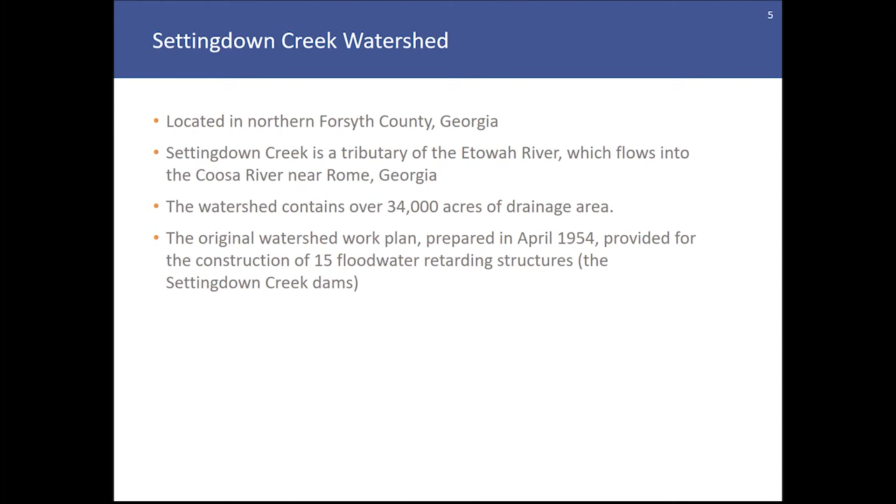The Settingdown Creek watershed is located in northern Forsyth County, Georgia. The creek is a tributary of the Etowah River, which flows into the Coosa River near Rome, Georgia. The watershed contains over 34,000 acres of drainage area, and the original watershed work plan, prepared in the early 1950s, provided for the construction of 15 floodwater retarding structures known as the Settingdown Creek dams.

This slide presents a delineation of the watershed overlain on aerial photography taken from the early 1960s, shortly after the Settingdown Creek dams were constructed. The watershed has changed some over the past 60 years with residential and commercial development entering this region.

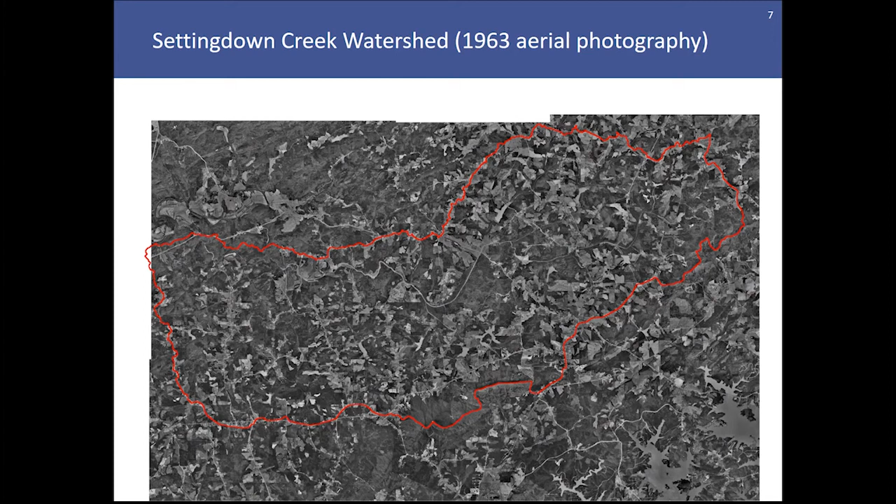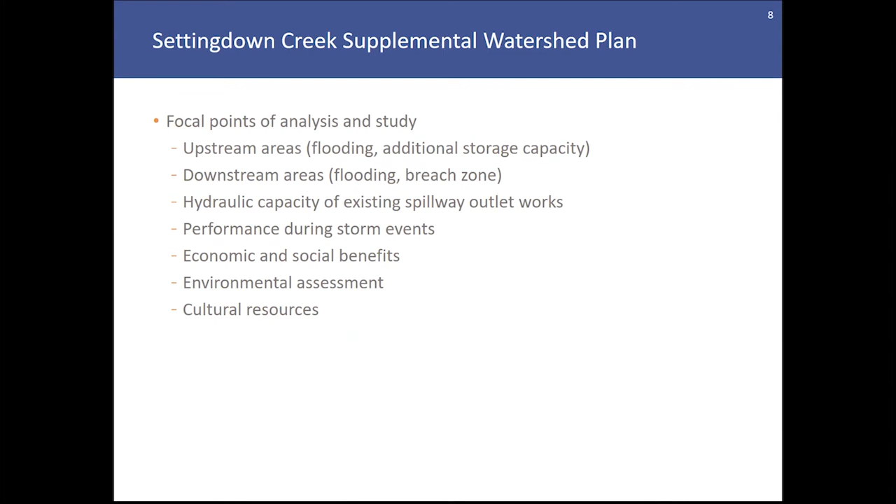Focal points of analysis and study associated with the plan include upstream areas subject to flooding, as well as an analysis of the need for additional storage capacity. Downstream areas are considered with regard to flooding associated with the 2 through 500-year storm events, as well as hypothetical breaches of the dam. An evaluation of the hydraulic capacity of the existing spillway outlet works was performed for various storm events. An analysis of the economic and social benefits provided by the dam was performed, as well as an assessment of environmental and cultural resources in the vicinity of the dam.

Settingdown Creek Dam number 56, which is the subject of this presentation, meets Georgia Safe Dams Program criteria to be considered a Category 1 high hazard potential dam. This means that failure or improper operation of the dam would likely result in the loss of human life.

The dam requires an operating permit from the Safe Dams Program. Previous dam assessments indicated that the dam does not comply with current SDP rules and requirements, which necessitated this planning study to further investigate its performance. The dam is not exempt from SDP rules and requirements.

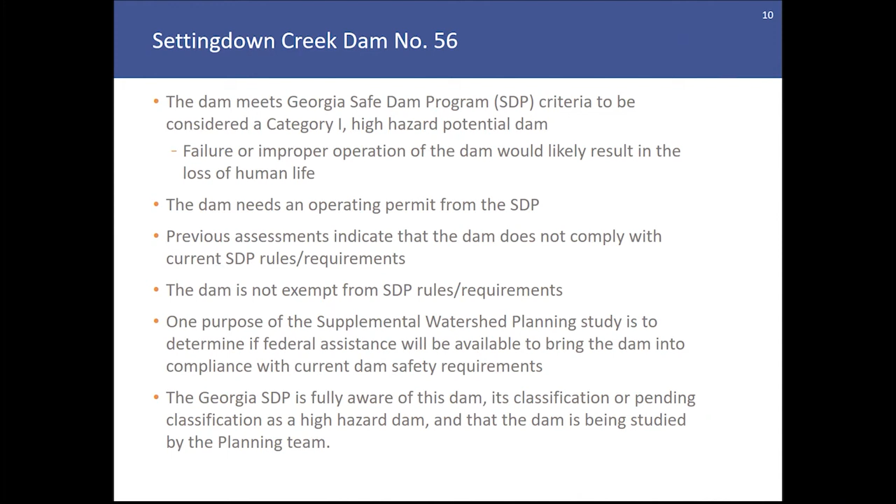One purpose of the planning study is to determine if federal assistance will be available to bring the dam into compliance with current dam safety regulations. The Georgia Safe Dams Program is fully aware of this dam, its classification as a high hazard dam, and that the dam is being studied by the planning team.

Some original design features of the dam include that the dam was not originally designed as a high hazard dam. The purpose of the dam is flood mitigation, and a secondary purpose is sediment accumulation and storage.

The principal spillway for the dam is composed of a reinforced concrete riser structure and a nearly horizontal pipe or conduit that connects the riser structure to the downstream end of the dam, where flows through the pipe discharge into an outlet channel beyond the downstream slope.

A vegetated earthen auxiliary or emergency spillway is also included with this dam, which is meant to convey flows associated with low frequency, high intensity storm events.

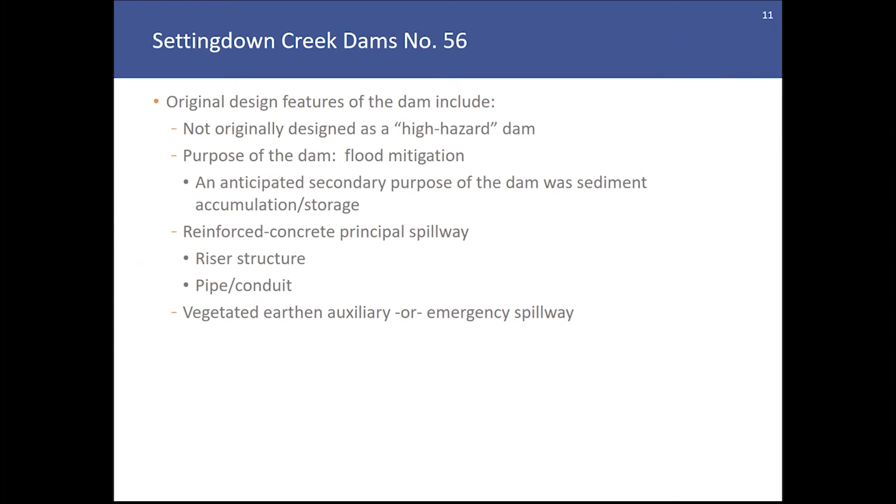Settingdown 56 is located west of Georgia 400, north of Hubbard Town Road, and south of Plainsman Circle. Construction of the dam was completed in 1954.

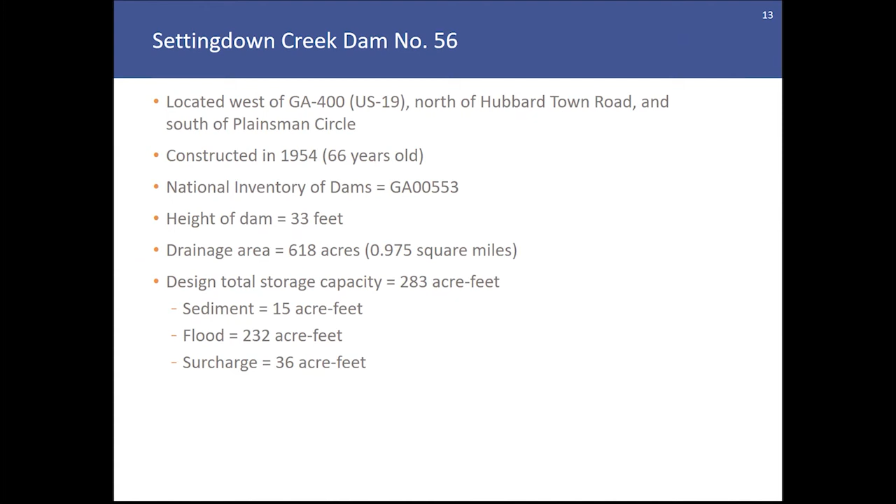The dam appears on the National Inventory of Dams and has a surveyed height of 33 feet. The drainage area is almost 1 square mile, and the design storage capacity of the dam is 283 acre feet, which includes consideration for sediment storage, flood storage, and surcharge storage.

We'll fast forward to a more current aerial photo and notice that the area immediately upstream of the lake has been developed with a residential subdivision, and some development has occurred immediately downstream of the dam on either side of the creek that discharges from the principal spillway system.

Note that Georgia 400 is located immediately to the east, or to the right of the dam and lake, in this view.

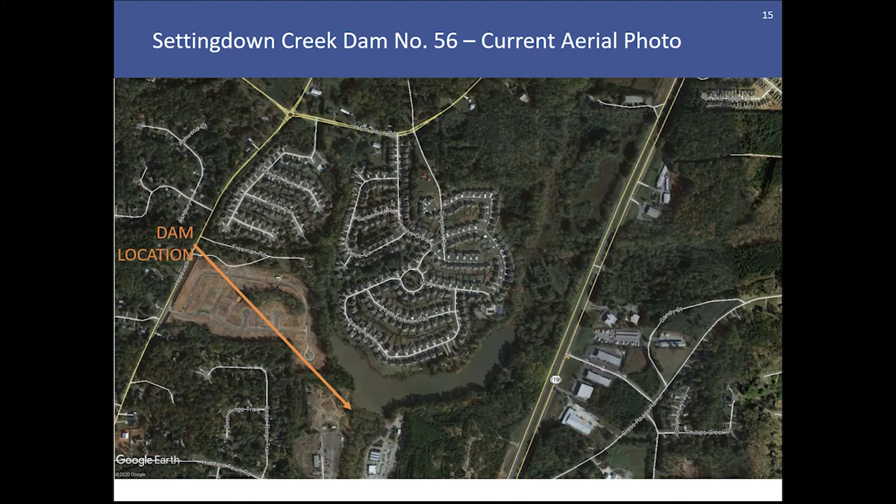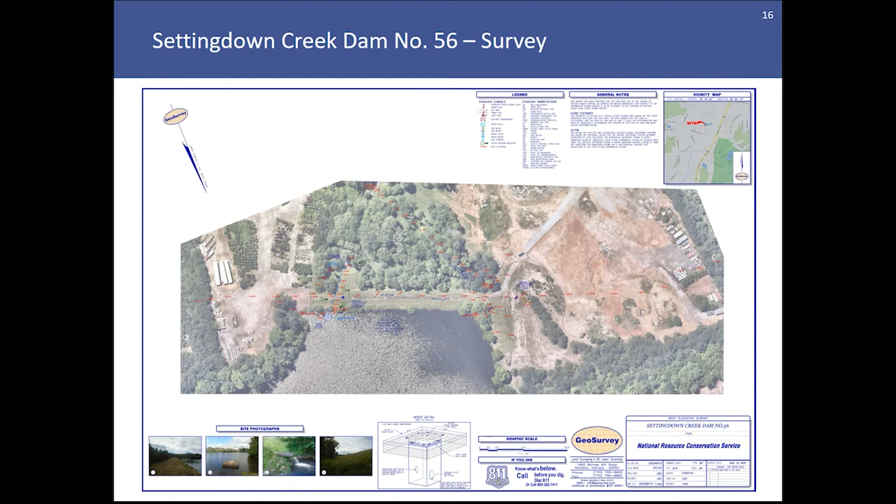This is a topographic site plan of the dam. The principal spillway is indicated near the left side at station 300 of the dam center line, and the auxiliary spillway is located at approximately station 700 in this view.

You can see that wetland areas delineated as part of the environmental survey have been identified backing up to the downstream toe of the dam. As we view this, keep in mind that downstream is up on the page and the lake is down on this particular view. Also of note is the presence of a sanitary sewer line near the right end of the dam.

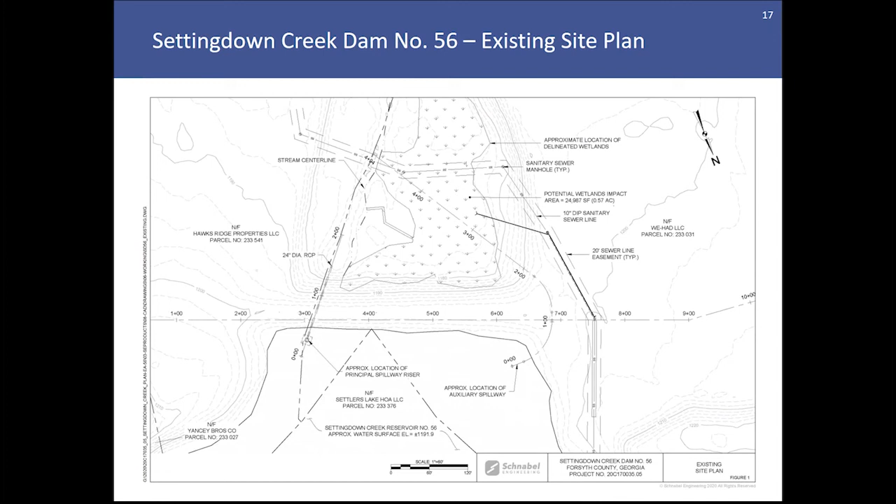The sanitary sewer runs through a portion of the auxiliary spillway channel and then turns, crosses the creek, and runs downstream, generally parallel to the creek that is downstream of the dam.

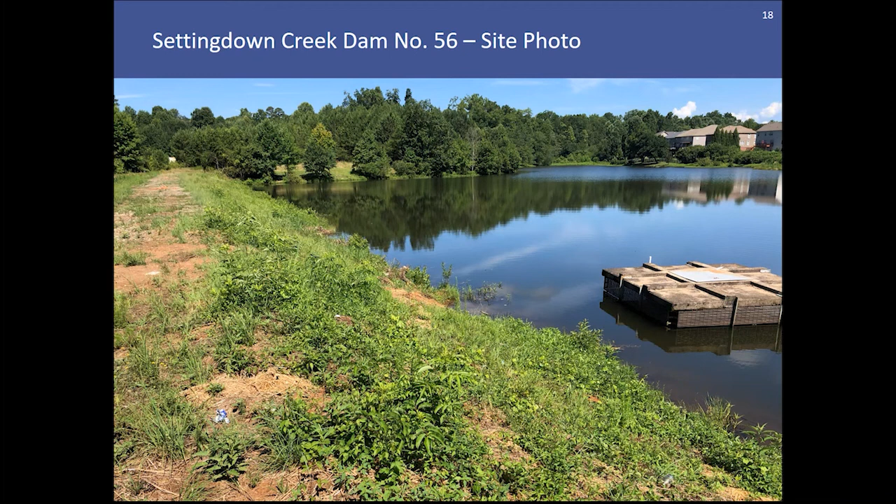This photograph is taken from the crest of the dam, looking slightly in the upstream direction toward the inlet channel of the auxiliary spillway. Indicated on this photo are the concrete riser structure, the upstream slope of the dam, and the crest of the dam.

At the top right-hand side of the photograph, you can see some of the houses that are part of the residential development just upstream of the lake.

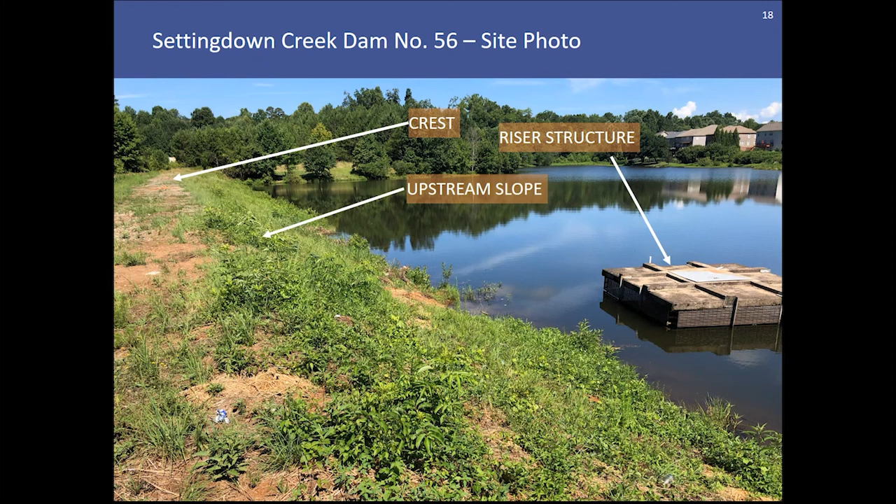This photograph is taken from the left side of the plunge pool downstream of the principal spillway outlet. We're looking in an upstream direction. The downstream slope of the dam is indicated in this view, along with the concrete principal spillway conduit and the riprap lined plunge pool for the dam.

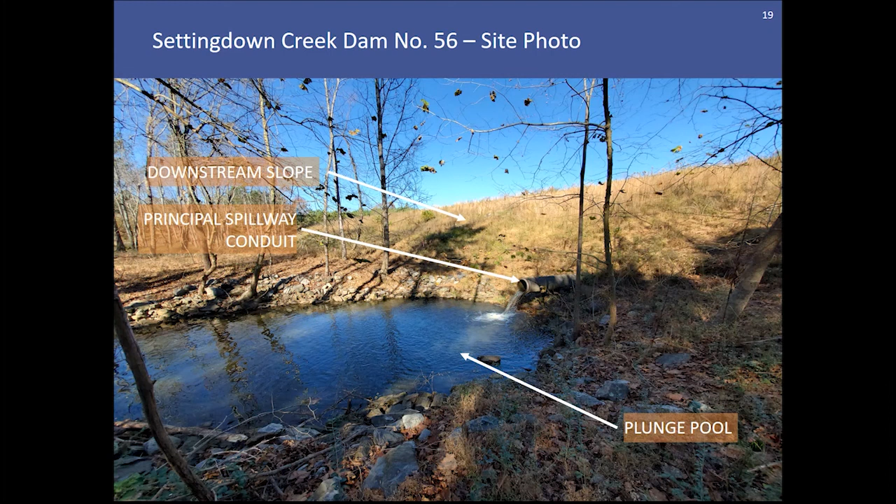An environmental survey was performed as part of the planning effort. The aquatic resource survey exhibit on the left-hand side of this slide shows the limits of survey performed for dam number 56, along with the locations of streams, wetlands, and open water that were identified.

Also shown are locations where invasive species in the form of Chinese privet, a vegetative invasive species, are located. As a result of the environmental survey, no protected species were identified or found during this work.

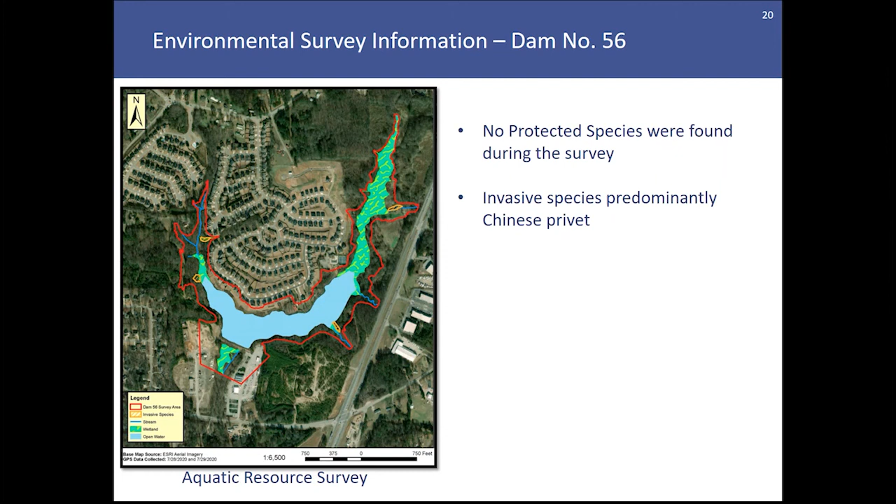A phase 1 cultural resources survey of the dam and its vicinity was also conducted. The cultural resource survey map on the left side of the slide shows the location of survey transects and shovel tests that were performed. A literature review was also performed to identify potential historic items of concern within the vicinity of the dam.

The study concluded with no archaeological resources recorded. The dam, being older than 50 years, is technically eligible for the National Register of Historic Places, but its listing is not recommended. Although the dam is old, there are no unique features or characteristics of the dam or its design that merit its inclusion on the National Register, in the opinion of the Cultural Resources team. No additional cultural resources work is recommended for this dam.

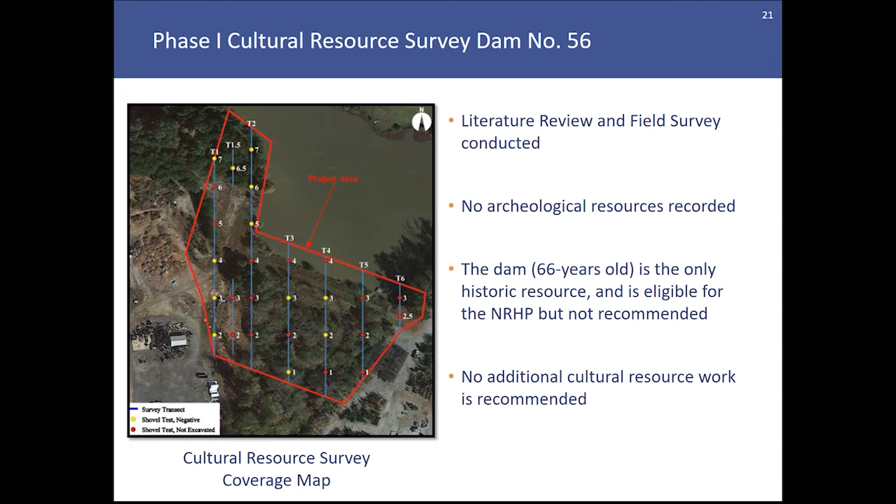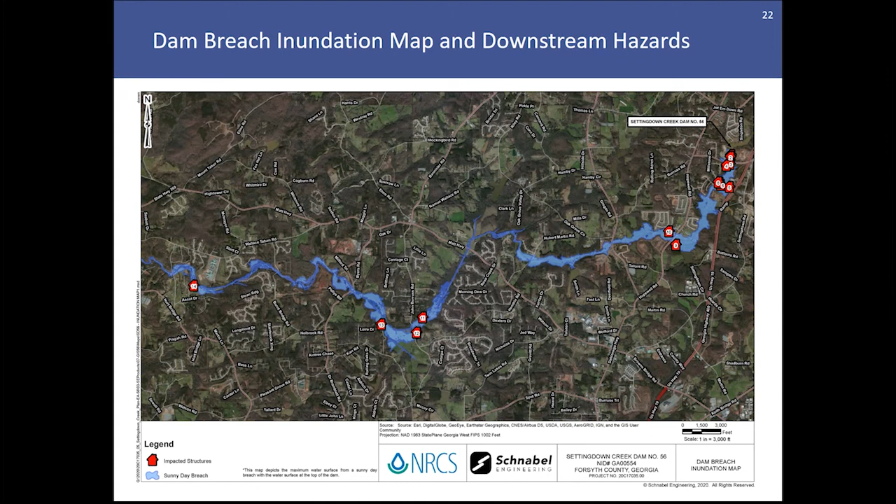In addition to the breach analysis, downstream flooding analysis associated with the 2-year through 500-year 24-hour storm events was considered. This map shows the extents of flooding associated with the 100-year and 500-year storm events in yellow and purple, respectively.

Additionally, some structures would be subject to flooding during these events, and those structures are indicated with the red numbered houses.

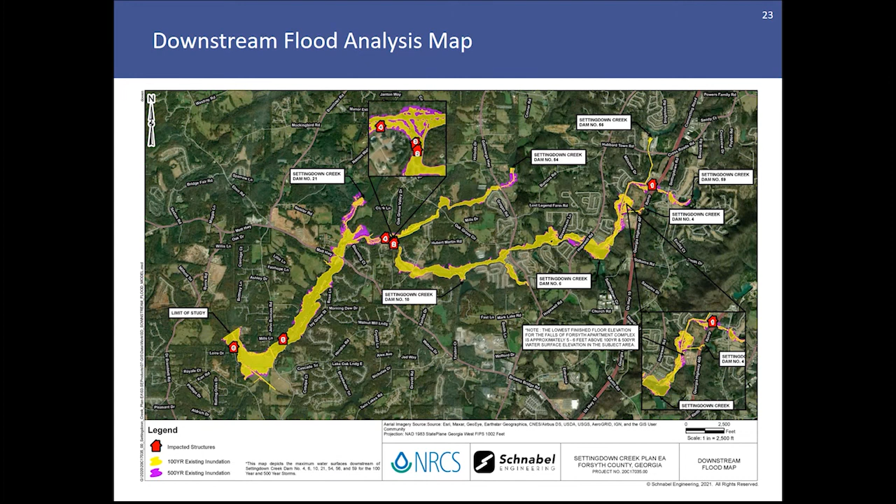Also, as part of the analysis, storms were routed through the dam and spillway outlet works to determine flood levels upstream of the dam.

The normal pool and elevations associated with the auxiliary spillway control section and dam crest are indicated on this view, as well as water surface elevations associated with the 100-year and 500-year storm event.

Additionally, storms greater than the 100-year and 500-year storm event are shown. The Georgia Safe Dams Program storm event is indicated in yellow, and the NRCS design storm event elevation is indicated in green. Note that there are 2 residential structures around the upstream edge of the lake that would be subject to flooding during the Safe Dams Program storm event and or the freeboard hydrograph storm event, which is the NRCS storm.

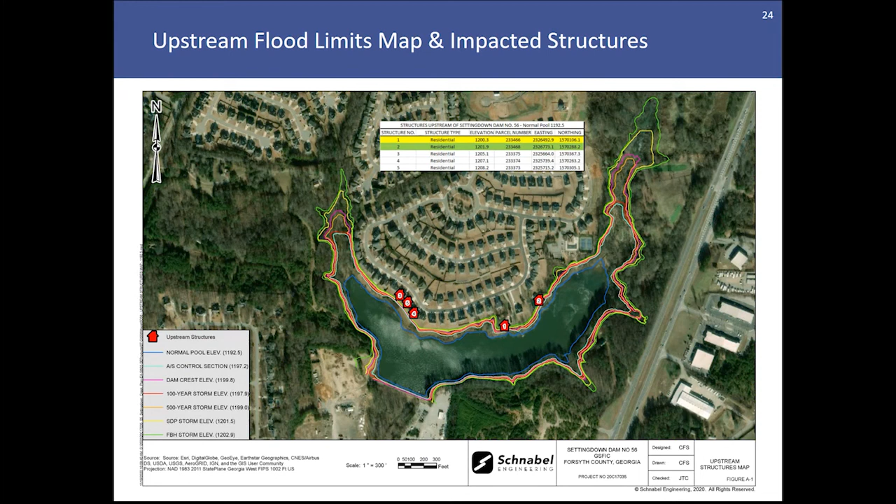This is a review of the existing deficiencies identified with the dam. Based on a review of records, the normal pool elevation of the lake was raised by 11 feet sometime during the 1970s without authorization.

This blocking of the principal spillway riser structure creates an issue with the level of downstream flood protection that the dam was originally designed to be able to provide. As noted previously, the dam was cleared of trees and inappropriate vegetation during the summer of 2020.

An underwater inspection of the riser structure concluded that portions of the slide gate assembly are worn and or corroded. It's unclear whether or not the gate system is operable at this time.

Portions of the riser concrete are cracked and or spalled, and a closed circuit television inspection, or CCTV inspection, of the interior of the principal spillway conduit was performed, and the condition of the pipe was determined to be acceptable for continued use.

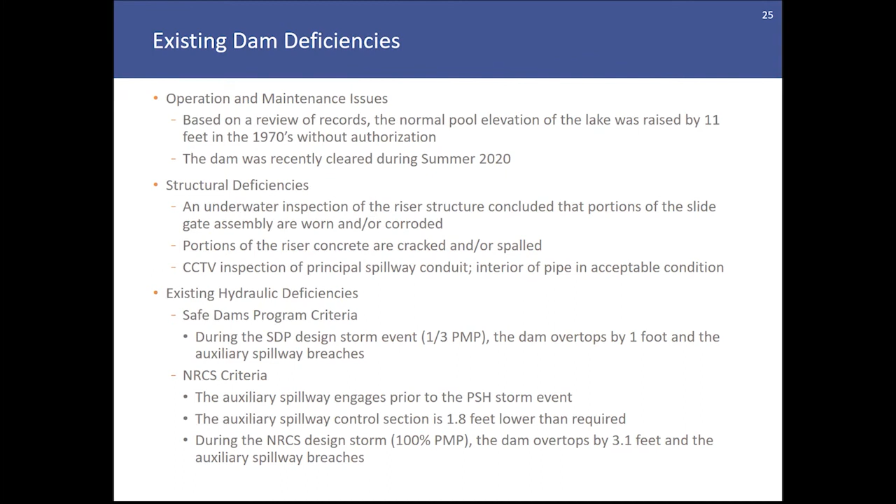The planning team has shortlisted 3 alternatives that will be discussed in this presentation today. One is a no action alternative that would not take advantage of federal investment and would involve either breaching of the dam or rehabilitation of the dam to state dam safety criteria. A decommissioning alternative is required for consideration as part of this planning process, and an NRCS rehabilitation that would take advantage of potential federal funding has also been shortlisted. We note that development of the NRCS rehabilitation alternative includes consideration of upstream non-flood control ponds, as well as uncertainties associated with climate change.

We'll start with the no action alternative, also known as the future without federal investment option. For this dam, it would be more cost effective for the project sponsors to permanently breach the dam in accordance with Georgia Safe Dams Program requirements. This would not be a total removal of the embankment, but a portion would be removed so that the lake would be permanently drained and maintained in an empty state. This alternative would involve revegetating the resulting lake bed to stabilize it.

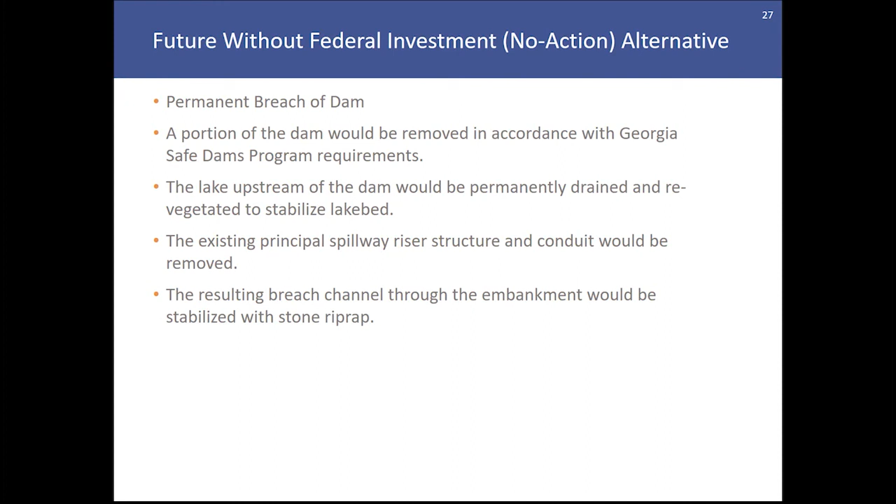The existing principal spillway system, including the riser and conduit, will be removed, and the resulting breach channel through the embankment would be stabilized with stone riprap. Breaching the dam to state criteria is a less costly alternative than rehabilitating the dam to meet the Georgia Safe Dams Program design storm requirements.

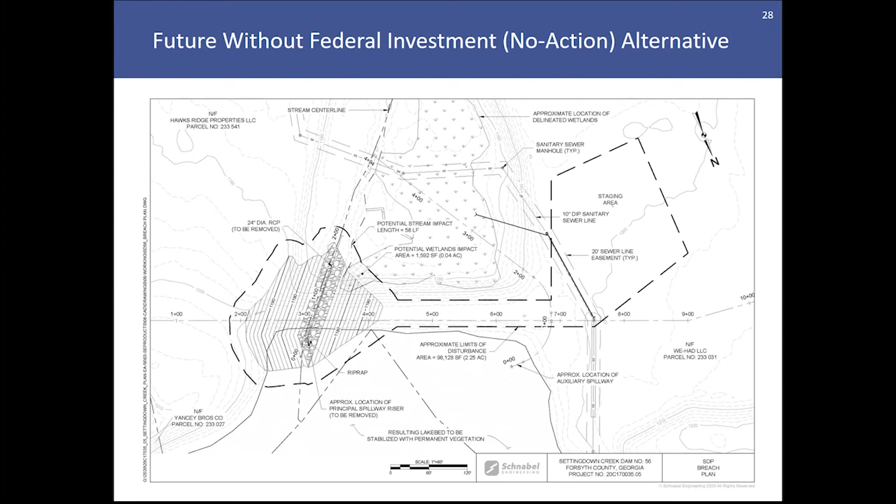This site map shows what an SDP level breach of the dam would look like. You can see the left end of the dam where the principal spillway system would be excavated. The slopes will be laid back and revegetated, the principal spillway removed, and the bed through the dam footprint stabilized with stone riprap. The lake would be permanently drained as a result, and the lake bed would be stabilized with permanent vegetation.

The decommissioning alternative would involve similar aspects as the Safe Dams Program breach, however it's a bit more involved. This would involve removal of most or all of the existing dam and principal spillway system, reconnecting the grade of the original floodplain, stabilizing the lake bed with vegetation, and stabilizing the primary channel through the footprint of the dam with riprap.

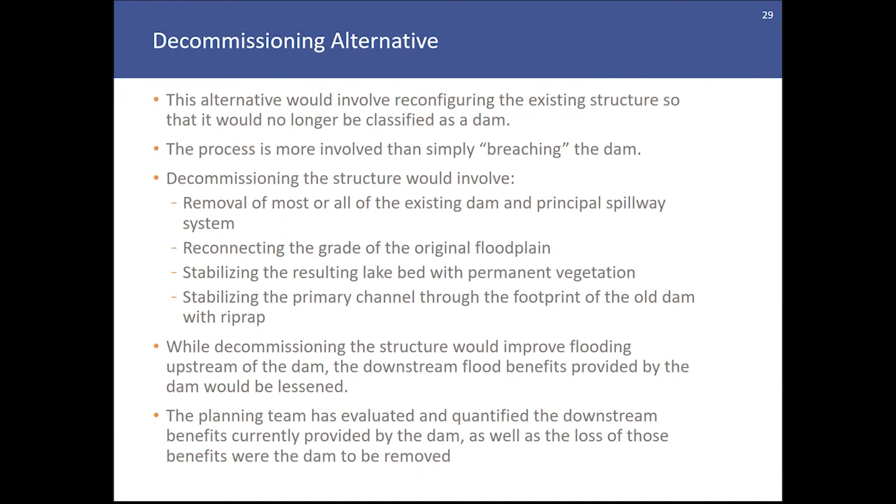Decommissioning the structure would improve flooding upstream of the dam, but downstream flood benefits would be lessened or lost. The planning team has evaluated and quantified the downstream benefits currently provided by the dam, as well as the loss of those benefits were the dam to be removed.

This site plan shows what the removal of the majority of the dam would look like. You can see some similarities with the Safe Dams Program level breach. The main difference is that the majority of the dam would be removed and the floodplain would be reconnected with this alternative. The lake and the areas within the immediate vicinity of the dam would likely revert to wetland areas.

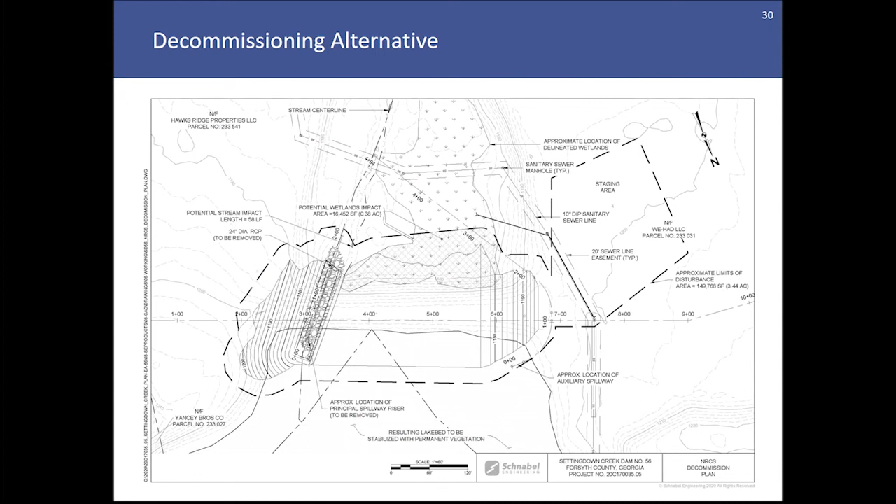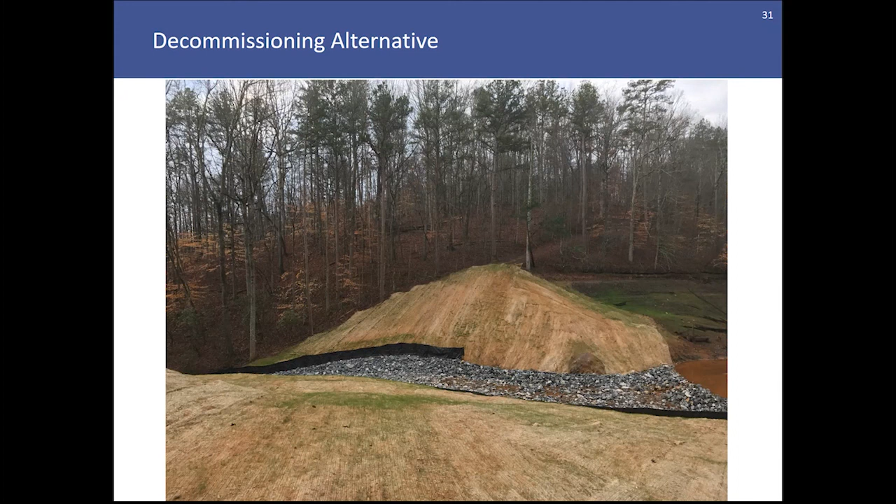This is just another view of the dam removal option and what it would look like.

The final alternative that we'll discuss is the future with federal investment alternative. This would allow the sponsors to cost share the rehabilitation effort with the federal government, with the NRCS, to rehabilitate the dam to NRCS standards.

This alternative would involve raising the crest of the dam to the current maximum water surface elevation associated with the design storm, regrading the upstream and downstream slopes to 3:1, constructing a riprap lined wave berm across the upstream shoreline of the dam, and decommissioning or closing off the existing vegetated auxiliary spillway with compacted earth fill up to the proposed dam crest elevation. The principal spillway system would be rehabilitated by removing and replacing the principal spillway riser structure.

We note that since the lake was raised without authorization in the 1970s, this alternative would involve returning the normal pool of the lake back to its originally designed elevation, so the lake would be 11 feet lower than it is today. The riser structure was blocked off, and water spills over the crest rather than through the intended low-level orifice of that riser structure. So the new principal spillway would establish a lower normal pool than what is evident today.

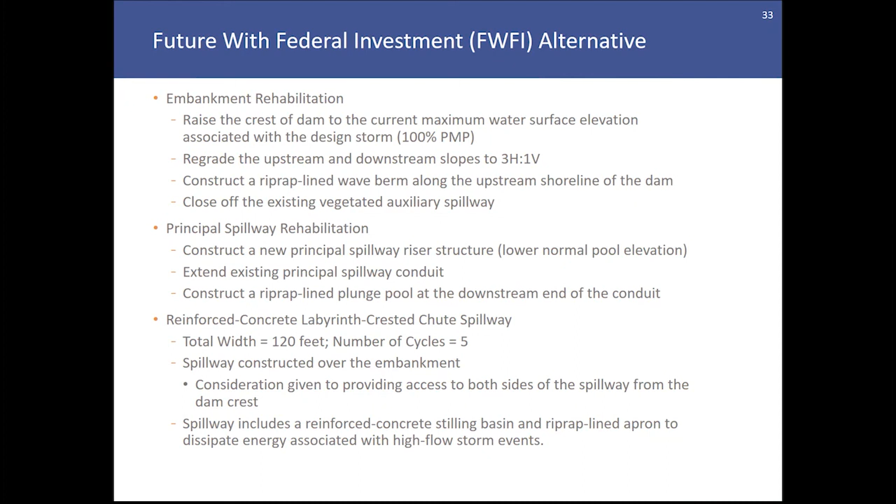The auxiliary spillway necessary to pass the NRCS design storm event for this dam would need to be 120 feet wide and would be a reinforced concrete labyrinth crested chute spillway. This type of spillway is a compressed weir, and it would have 5 cycles. The spillway would be constructed over the embankment, giving consideration to access to both sides of the spillway. The spillway would include a reinforced concrete stilling basin and a riprap lined apron to dissipate energy associated with high flow storm events.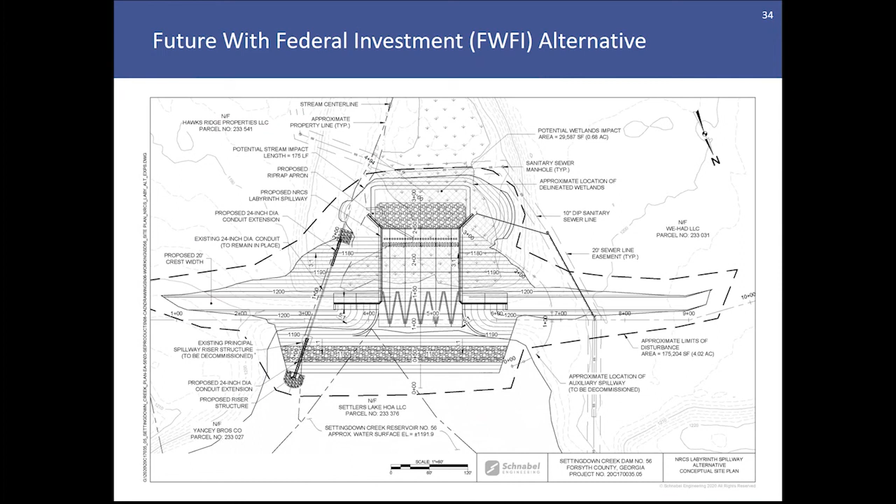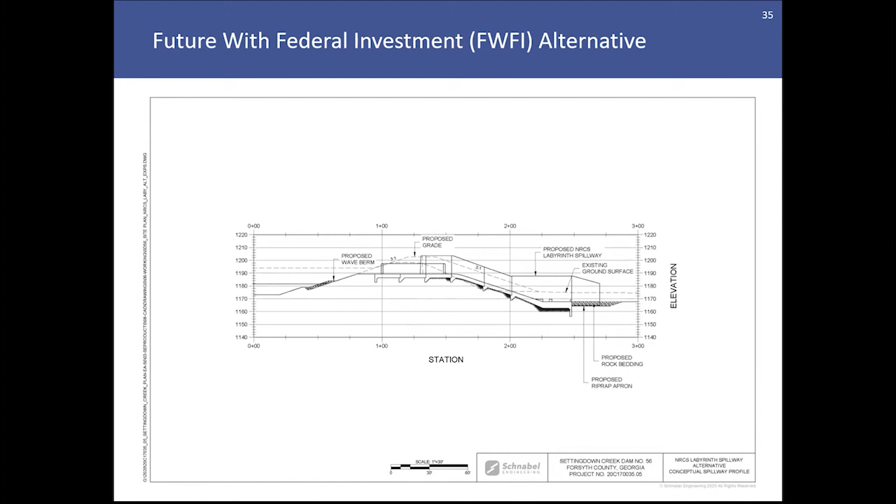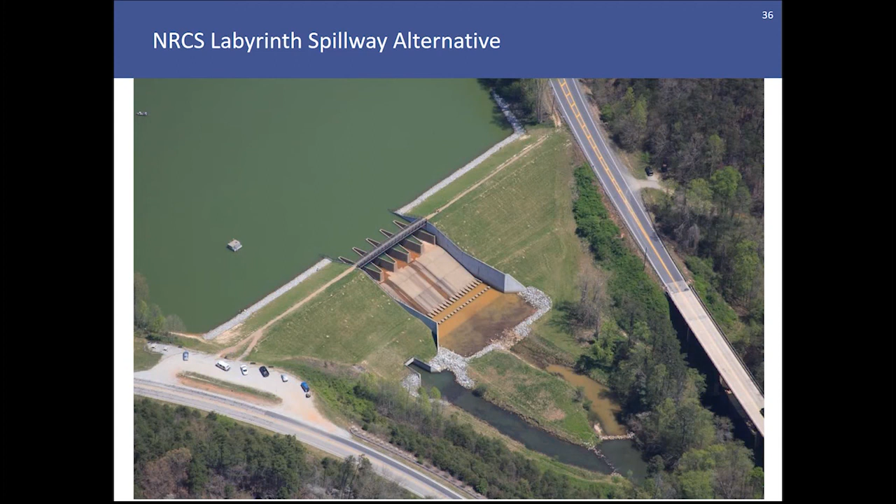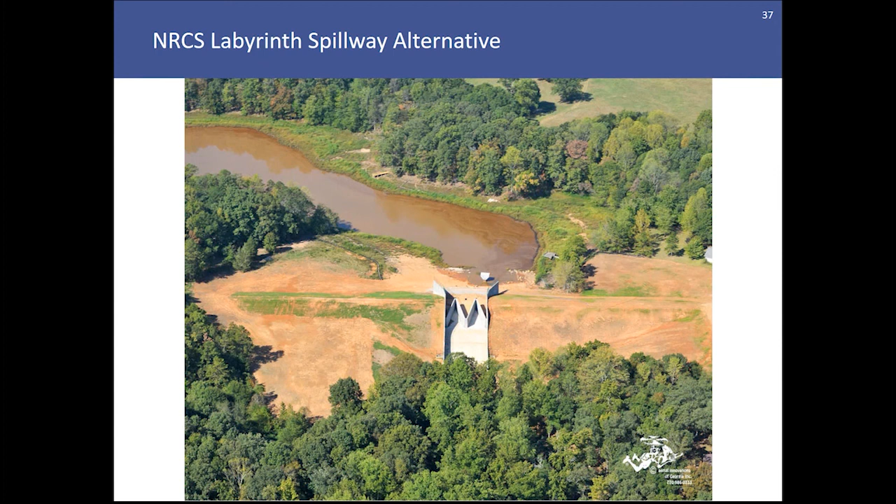Here's another example of a labyrinth crested spillway over an earthen embankment dam. This one is a smaller spillway with 2 cycles. We're looking at this one from the downstream vantage point, looking in an upstream direction. You can see the new riser structure, or at least the top of it, just upstream of the labyrinth spillway.

Based on the results of the planning study and discussions with the project sponsors, including representatives of the state NRCS, the planning team is presenting the locally preferred alternative for this dam as the future with federal investment alternative. As just described, this is the alternative that would result in a new principal spillway riser structure that would establish the normal pool at the original design elevation of the lake. The dam crest would be raised, the embankment slopes would be flattened, and the auxiliary spillway necessary to pass the NRCS design storm event for this dam would be a labyrinth crested concrete auxiliary spillway.